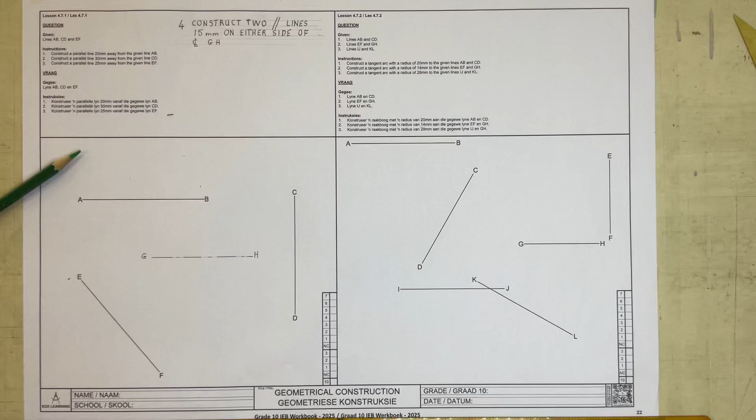Alright, we're going to be looking at this next exercise. I've given you another little question to do. Number 4: construct two parallel lines, 15 millimeters on either side of the center line GH. So there's my GH over there, and we'll get to that in a moment.

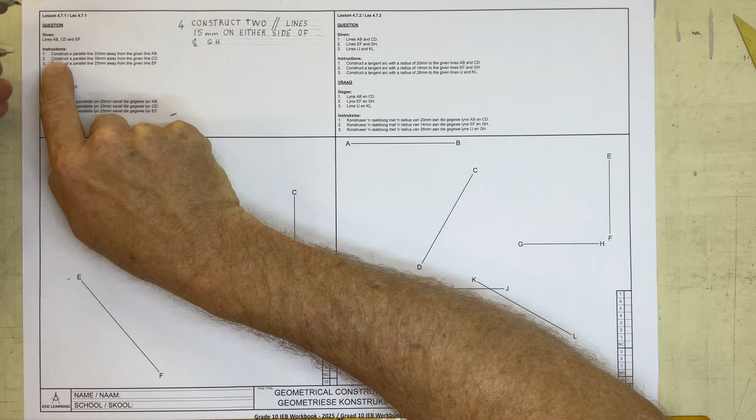Number 1: construct a parallel line 20 millimeters away from the given line AB. There is AB over there. You're going to take your pair of compasses, set them to a radius of 20 millimeters, draw a little construction line arc over there, and I can now draw a tangent to the top of that.

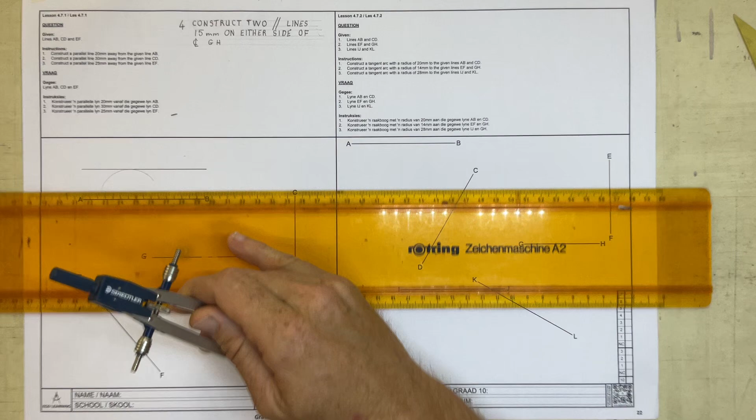Same story over here. Construct a parallel line 30 millimeters away from CD. I'm going to take my pair of compasses, set it to 30 millimeters, go in over here, and draw a construction line arc, then draw a line coming down, and that distance from there to there is 30 millimeters.

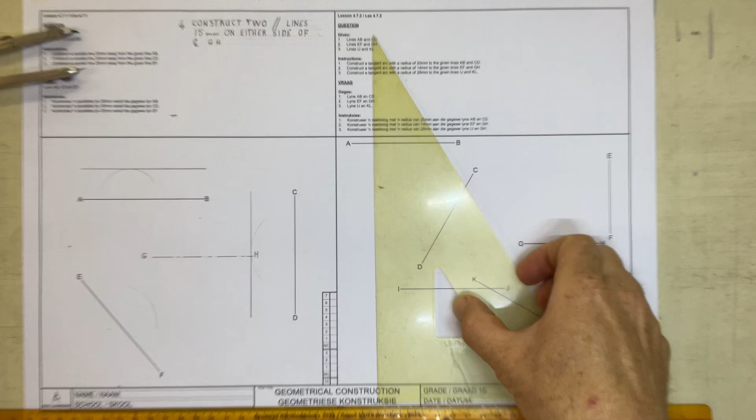Last one, construct a parallel line 25 millimeters away from EF. Set your pair of compasses to 25 millimeters, go into EF over here, draw a construction line arc, and for this you're going to take your two set squares lined up together.

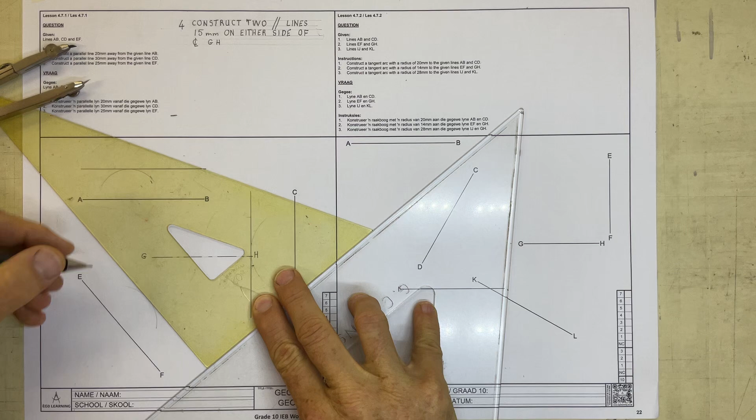This is a very important exercise. Take your two set squares, line them up. So this is lying against EF, that's up against that edge. I slide that back, and I get this line drawn 25 millimeters away from EF.

The last one, I've got this GH line. This is a really useful thing to be able to do. You take your circle stencil. It says that I need a 15 millimeter gap on either side, so I'm taking my 30 millimeter circle stencil. There it is, 30 millimeters.

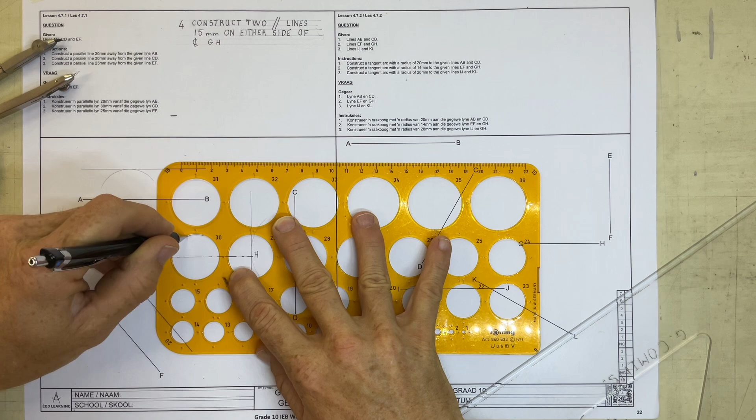I line the center of my circle stencil in like that, draw an arc on that side, an arc on that side, and I can now draw in those two parallel lines that are exactly 30 millimeters apart from each other and 15 millimeters on either side of that center line. You will see this used a lot in mechanical drawings we'll be doing later on.

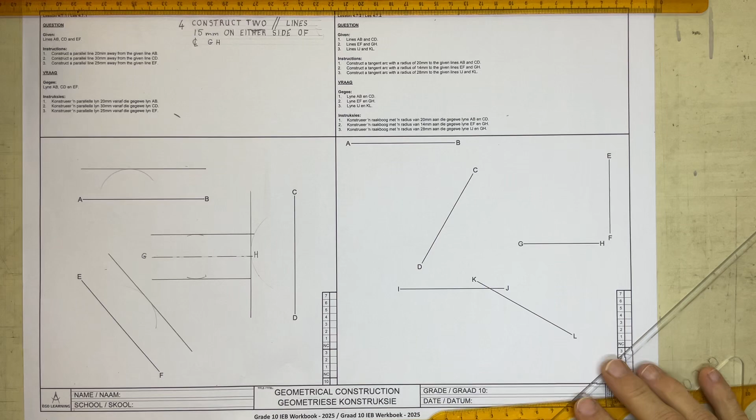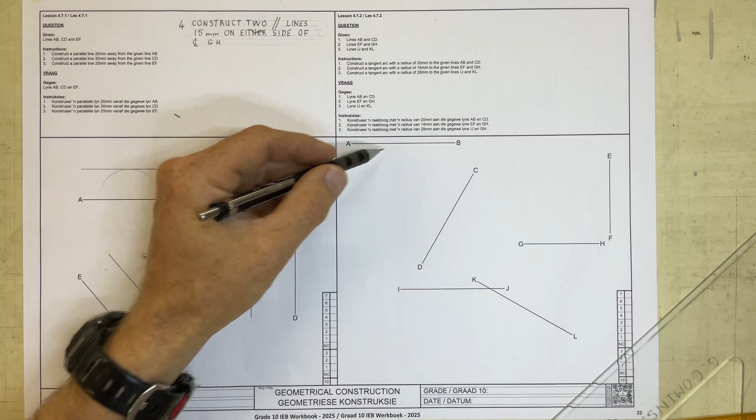This one over here, they've given you lines AB, CD, EF, GH, IJ, and KL. It says construct a tangential arc with a radius of 20 millimeters to the given lines AB and CD. So there's AB and CD, and I need to have an arc which is going to connect over here.

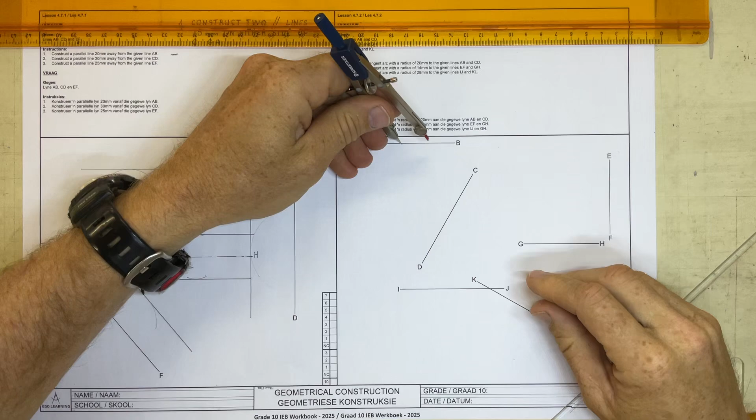What I need to do is take my pair of compasses and set them to that 20 millimeter radius. You're going to draw a construction line arc coming around like that. This is a construction line arc going around like that.

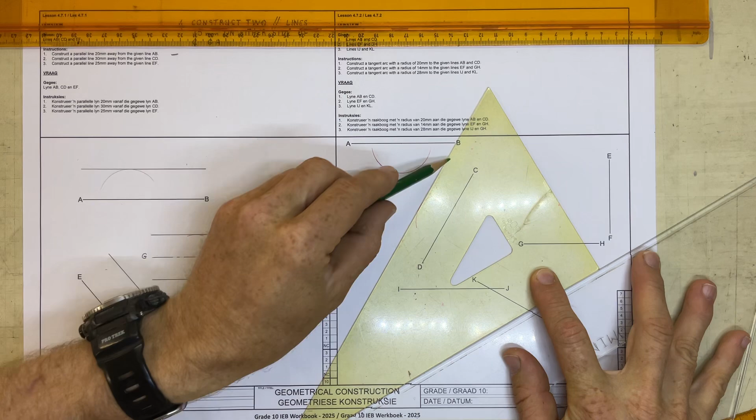I now take my set squares and line them up over here, line that up on CD, slide it out, draw a construction line going like that. Take your line over there, AB, that lines up with my T-square, so I can draw a line coming across like that. That gives me the center.

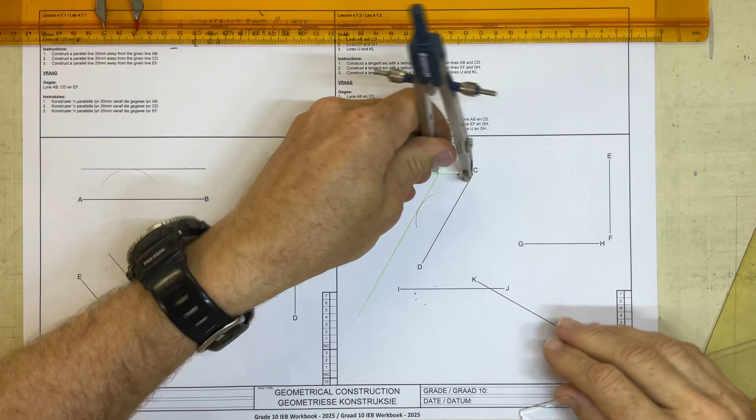I now take my pair of compasses set to that 20 millimeters, come in over here and draw in that arc that will come around like that, and it should, if I've drawn accurately, link up beautifully over there and over there. Always check before you start drawing that it actually does link up. There's my construction, my arc connecting up with AB and CD.

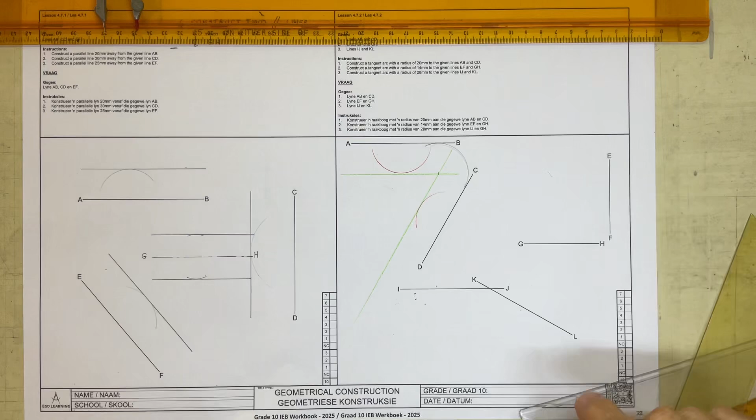Over here it says draw a tangent arc with a radius of 14 millimeters between EF and GH. If you look at this, this line over here is coming straight down. That's lined up with that, and that's lined up with that.

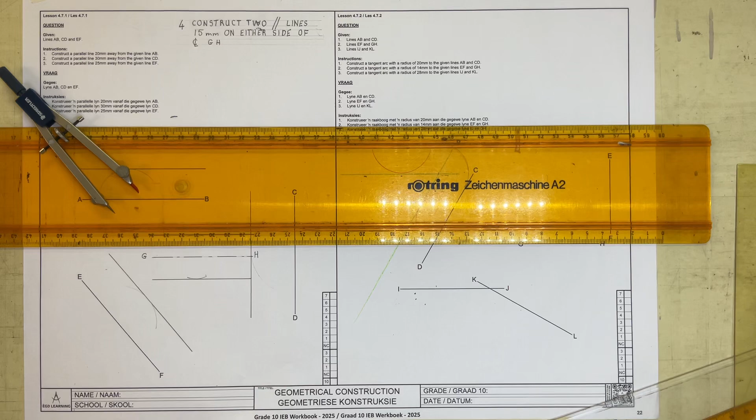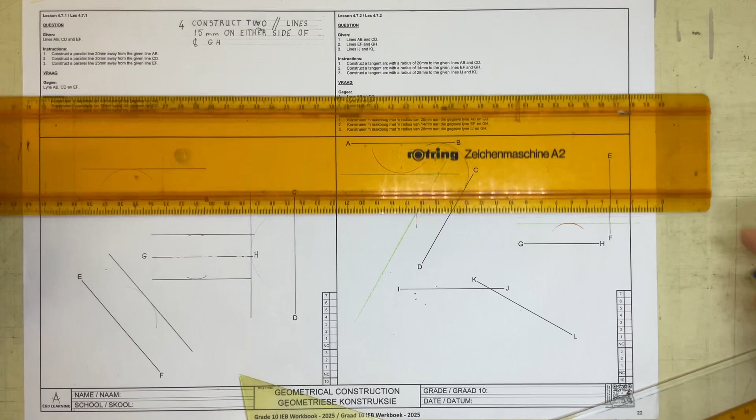So what I'm going to do is measure off that 14 millimeters with my pair of dividers. I'm going to clock that in over here, like that, draw a line coming across, a nice little construction line coming across over there. And once I've got that, if I just extend this out a little bit and take this down over there, then take a 45-degree angle going from that corner over there.

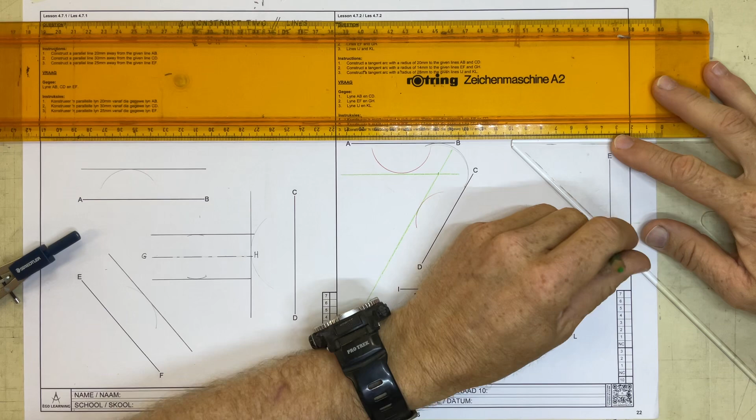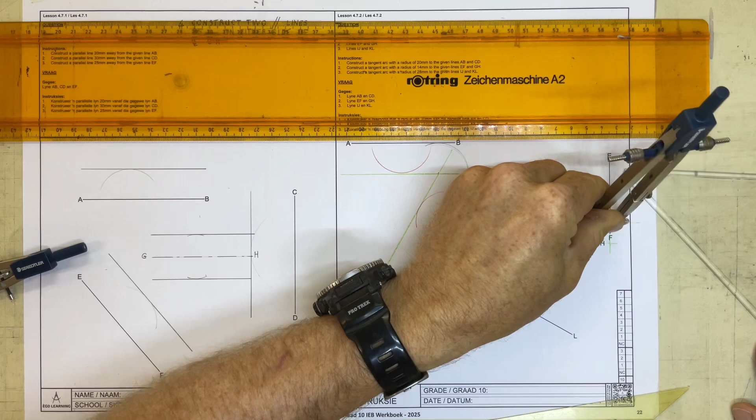That will give me the center that I need, and I can now take my pair of compasses set to 14 millimeters. I'm going to knock that in at that center over there. That should link up perfectly on that line and on that line. Let's just get that in the right position and draw that little arc going around over there. Right, there we go, that's that done.

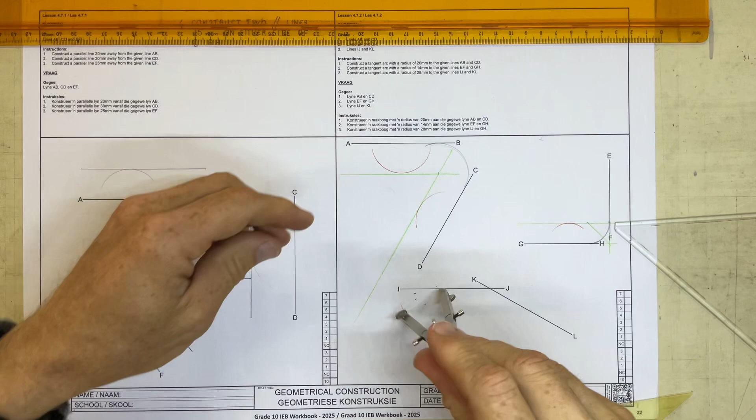This one over here says construct a tangential arc of 28 millimeters. I'm going to set my pair of compasses to 28 millimeters. Come in over here, draw in an arc coming around like that, and I now draw a construction line coming across over here.

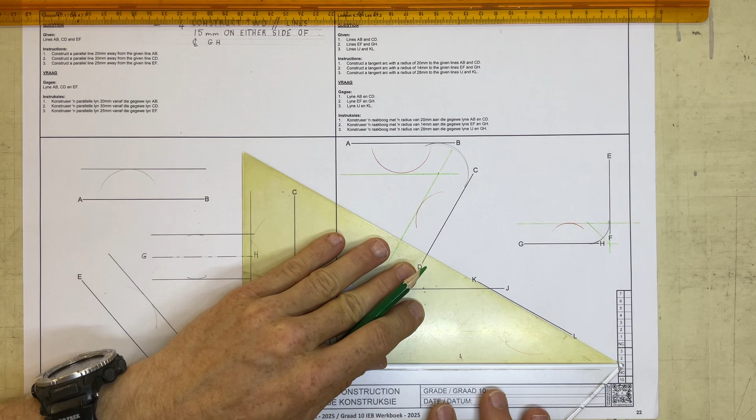There we go. And I can take a construction line after I've lined these lines up over here, lining that up with my line over there, and slide it out until it intersects. Draw a construction line over there, and I can now set my pair of compasses to 28 millimeters. Come into that center over there, links up over there, links up over there. If I can just get it moved to the correct position on the center.

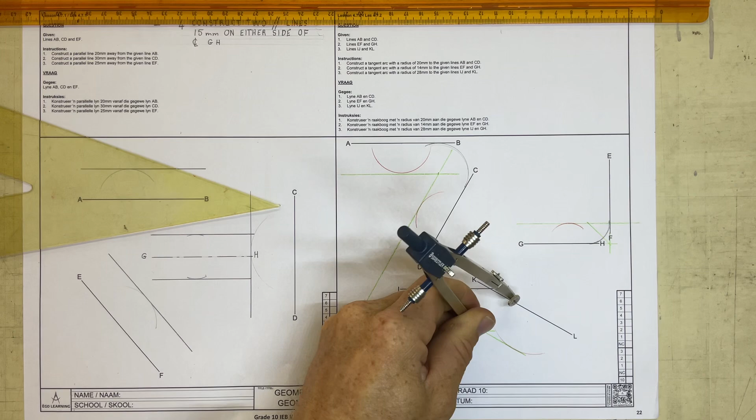There it is, and draw in that little arc. Oh sorry, my pair of compasses just moved there. 28 millimeters, let's just do that. Sorry, gents, there we go.

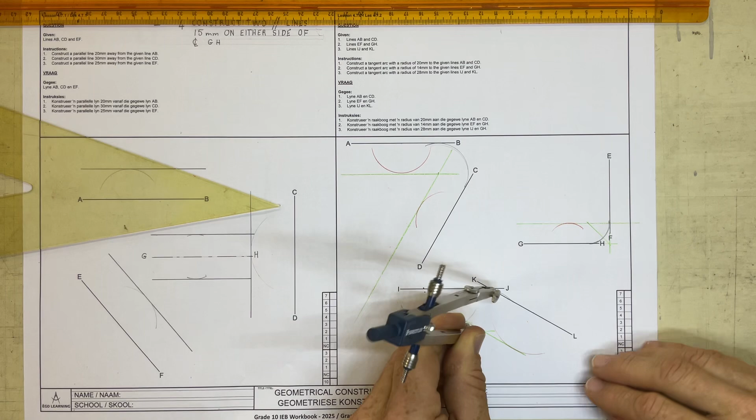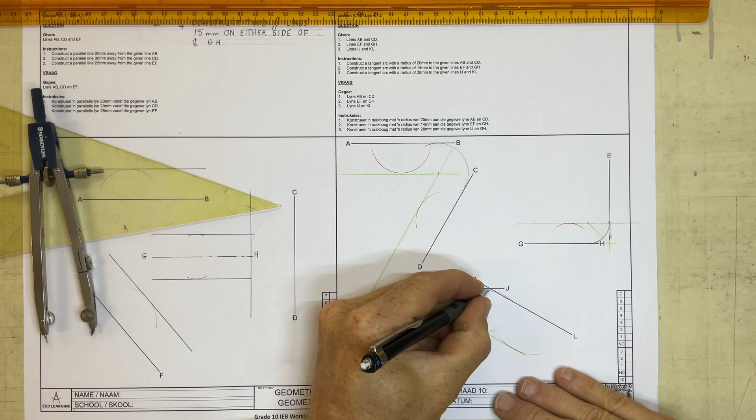That links up there, that links up over there. Let's just get this thing in the right place. 28 millimeters, and I can then draw that little arc. It's not very clear on this drawing, but there is an arc going in over there. I'm just going to erase that little line that I made a mistake with. You should be able to see an arc literally on that line over there, it's a very small little arc. Right, that's that done.